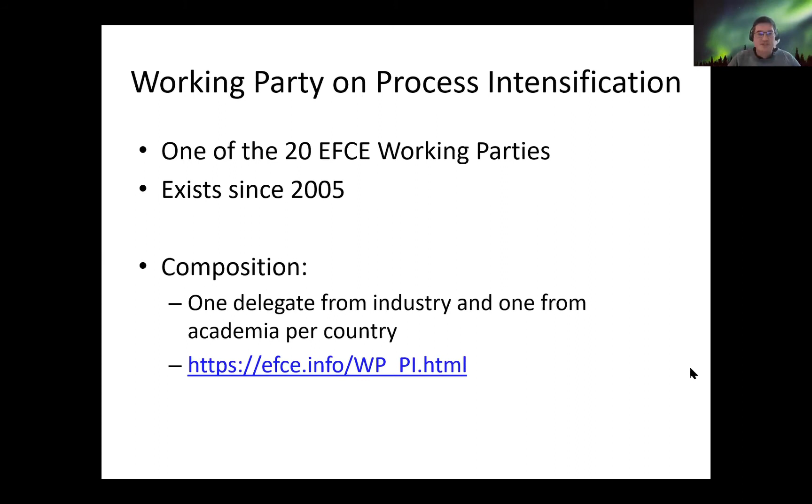What I want to do in my introduction is just shortly highlight three activities of the PI Working Party and even broader the PI community. First of all, the conference series that we have, the awards that we're handing out, and the support we give to handbooks and papers on process intensification.

We have a conference series, the International Process Intensification Conference. This has actually grown out of the European Process Intensification Conference, which was called EPIC. But since two editions, we have converted this into an international one with a lot of contributions from the US, from North America, South America, but also Asia. So the last one took place in 2019, last year. We had about 160 participants.

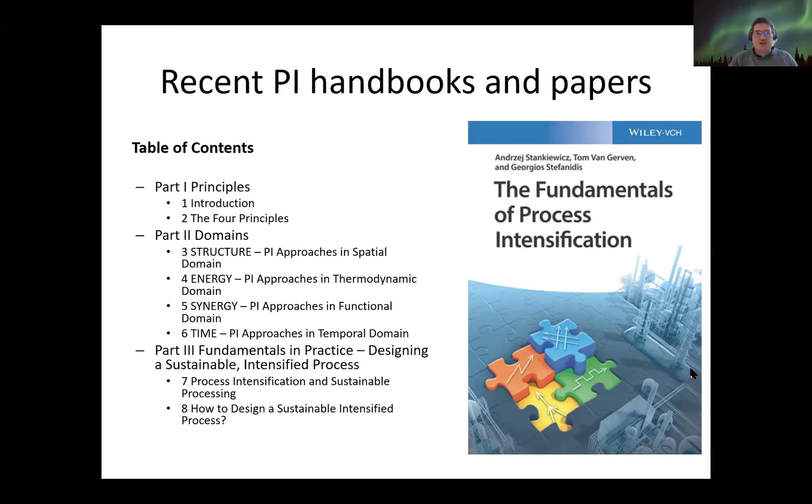And then a third activity of the PI community or the PI working party is to also support and develop handbooks and papers. I've just listed a couple of them. Of course, it's always difficult to be very exhaustive on this. But just as a couple of them, we have the Fundamentals of Process Intensification, which has come out, I guess, 2019. We have Process Intensification for Design, Industrial Innovation Practices and Education. This is the book by Jan Harmsen and Maarten Verkerk, from which they will take inspiration for their lecture later this morning.

There's also the handbook on process integration and intensification by Jiri Klemes, which will get a third edition coming out soon, probably 2021. I also want to highlight the fact that not only handbooks are being supported, but also papers. And I really want to highlight the activity that David Rivas and also Daria Boffito did last year to come up with these two papers on the current education of process intensification, and David will talk about this in his lecture as well.

And obviously, besides papers and handbooks, there's also a lot of journals that are related to process intensification. The Chemical Engineering and Processing journal, which I already mentioned, the newer one, Journal of Advanced Manufacturing and Processing, since 2019, and then there's even a more recent one, Open Access Frontiers in Chemical Engineering, for the section of Microfluidic Engineering and Process Intensification.

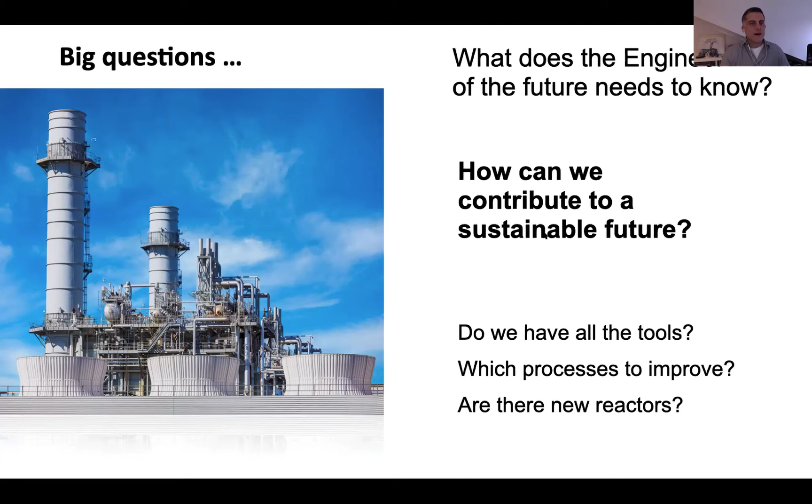So some of the big questions that we all have when we're trying to teach the new generations of engineers, and interestingly, they also have similar questions: what do we really need to teach the engineer of the future? How can we contribute to a sustainable future? Are we already prepared with sufficient tools to do that? Is there a new reactor that we could use to replace existing reactors? Other questions: is the university the right place to learn it? How can we make sure, as we are talking today about lifelong learning, that people who left the university 10, 20 years ago get the best information out there?

And then a question that is emerging more and more in the universities is: can I become my own boss? Because students follow in the news that many big companies are sometimes shedding labs or firing researchers. So this is something we also need to educate the new engineers about, that at some point they can have their own company, be their own bosses.

Now, a very short detour connected to this entrepreneurial or valorization approach. For those of you who are not familiar with the University of Twente, we're trying to claim that we are the most entrepreneurial university in Europe, at least. And there are several examples of success stories. Some of you probably have used Booking or Takeaway. Here is a small logo of the spin-off company that I started about 7 years ago. And for those who are interested in knowing more about Twente, here's a website.

As I mentioned in my first slide, I'm embedded in the Mesoscale Chemical Systems group. The word mesoscale gives us a lot of freedom to move from the nano, micro, all the way to the scale that we decide is large enough to do our research. We are a multidisciplinary group with sufficient clean room technicians, so we do a lot of microfabrication ourselves. And my own research, which I will not be talking much about today, is about exploiting bubbles and doing applicable research.

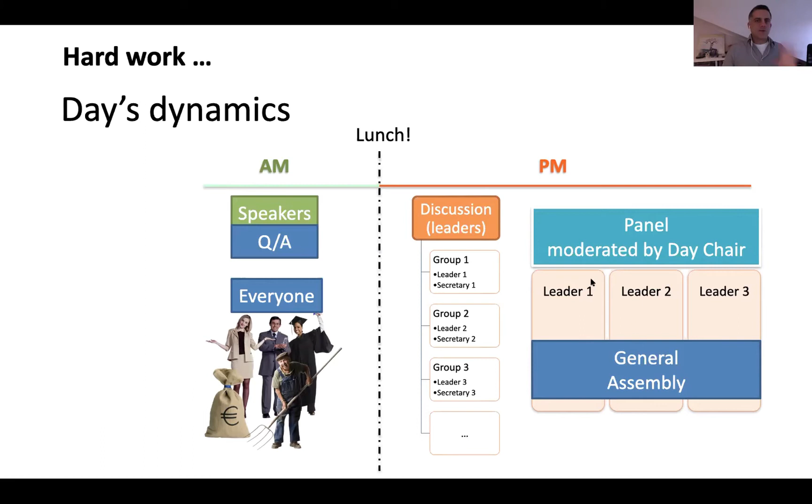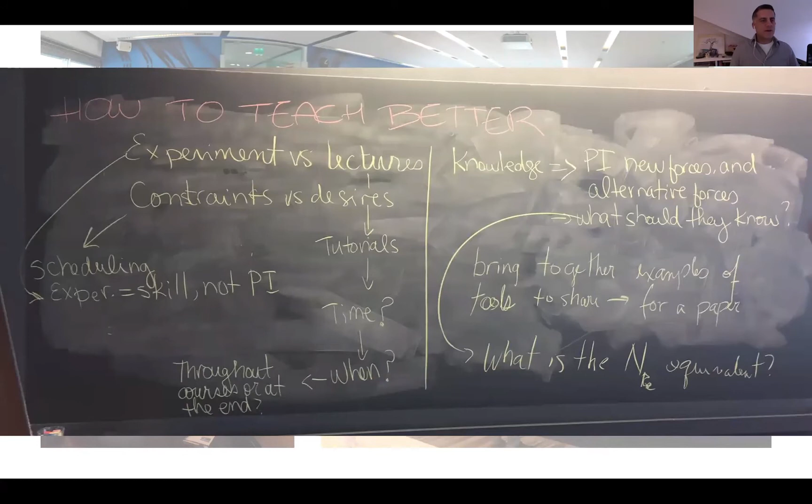And then in the afternoon, we will split into smaller groups to discuss some of the elements connected to those lectures given in the morning. So you can see here a feeling. So actually it felt like a classroom. So we had people who probably didn't sit in a classroom for like 30 years going to the blackboard and, well, giving input. So at the end of each day, we will collect all this information and try to give the next morning some summary in plenary session so that everybody could follow the whole thinking process.

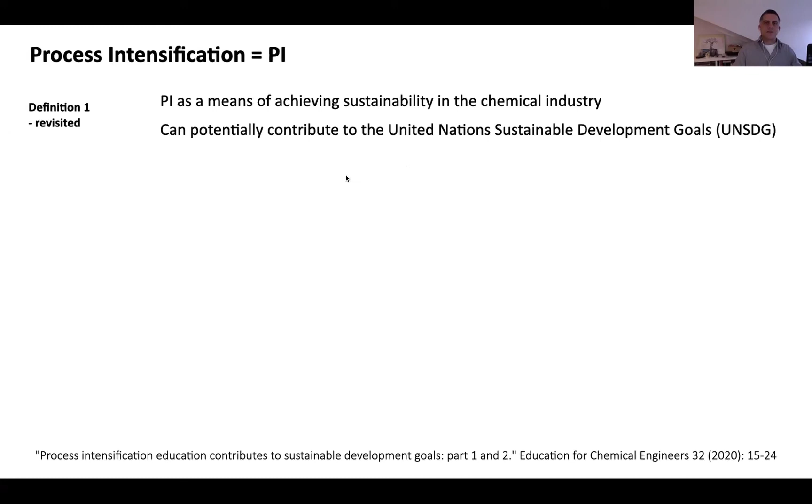Now, probably it's important to define what we mean with process intensification. And in these two papers, we have updated or refined the definition, which of course there are many books out there, but we try to synthesize it with the opinion of these 30 experts that joined during that week. So the most interesting part is that we see that PI can really help the chemical industry to jump from the fossil-based, say, track record or history path that we've been working for many years now, and move into some renewable-based chemistry. And we identified these 6 sustainable goals from the United Nations.

And well, in view of time and also to give chance for more questions, I'm going to skip some of these slides or move a bit faster so that we can have a better dialogue. And most of the details you anyway can see in the paper. I have to say the second part is open source, so you can download it freely. If you, for some reason, have no access to part 1, there are 2 ways to get it. It's either through my university website, so we have it already posted there, I think also on ResearchGate, but also you can send me an email and I'm more than happy to share with you.

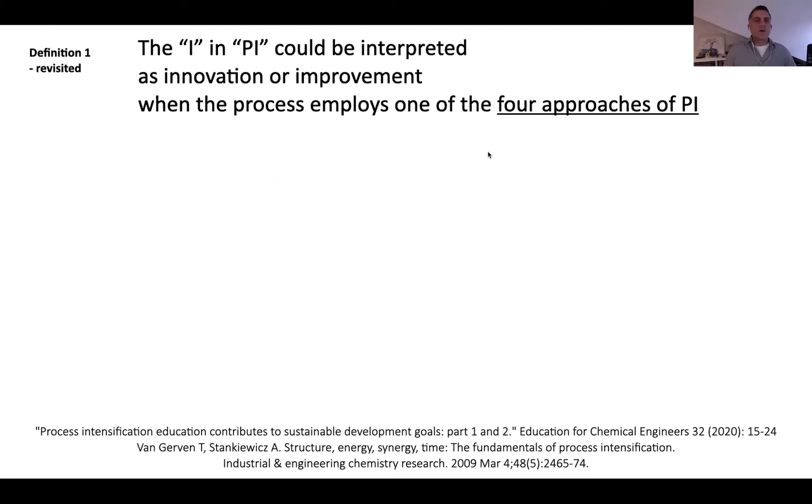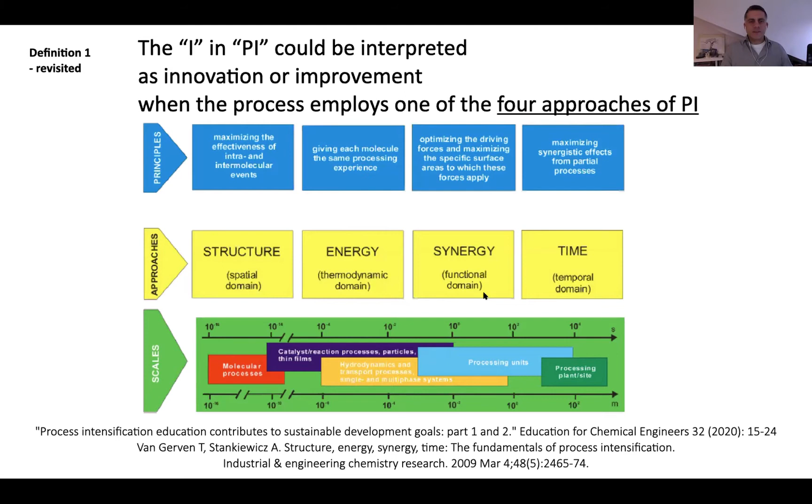Now, an interesting update that we bring to the PI definition is that we all agreed that the I in PI could be seen as innovation, improvement, and we also thought that it would be important for newcomers to the field to at least check this framework given by the structure, energy, synergy, time approaches, and the 4 principles of PI that were introduced a while ago by Tom and Andrzej Stankiewicz. And well, it's not my role to walk you through this schematic. So this is an invitation for some of you who are not familiar with these schematics. Please take a look at it because it's very helpful.

Now, after that event, we also kept thinking. So Daria, my co-applicant for the event in the Lorentz Center, and we had another publication that goes a bit more into details and it's a bit more technical, because the part 1 and part 2 papers that we're discussing right now are a bit more on the educational challenges and some opportunities, and you will see some examples of what was discussed there. But for some of you that would like to have a recent snapshot on how PI can connect the different scales and somehow the relation with process systems engineering, please check this paper as well.

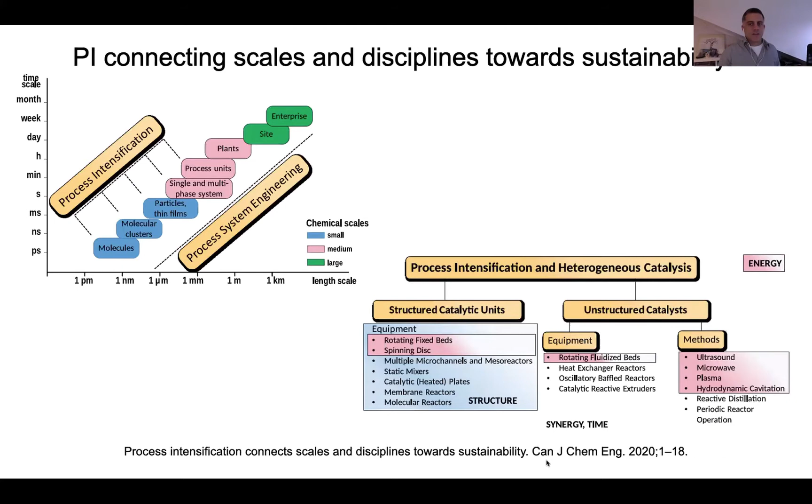Now, going back to the definitions of PI, so we also agreed that we see it as some sort of departure from the conventional way of doing things. We also identified that PI should in the future be not only concerned about the equipment or the specific driver that puts you there in the first place, but it's like what really happens outside the process and what are the consequences that your process could have for the environment or the economy.

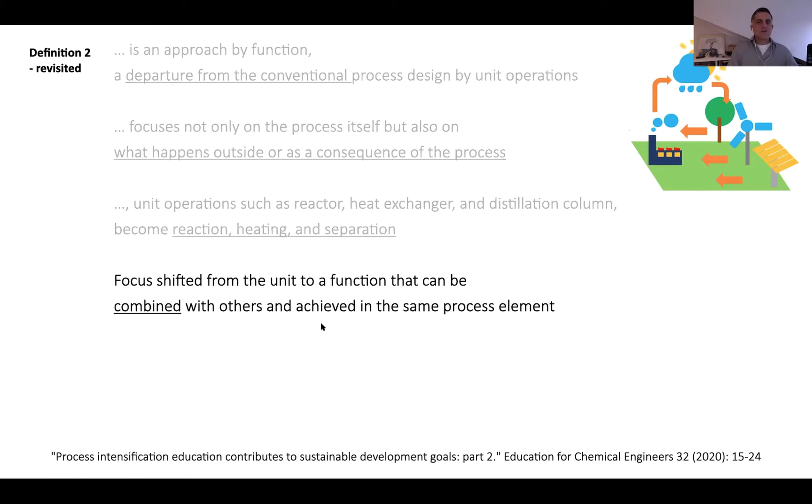So instead of having unit operations, we will have some, how to say, functions, and that can be a bit difficult to explain here, but it's better detailed in the paper. And one element that process intensification typically brings is combining several concepts or equipment or processes into one, and ideally you should have some significant improvement by doing so.

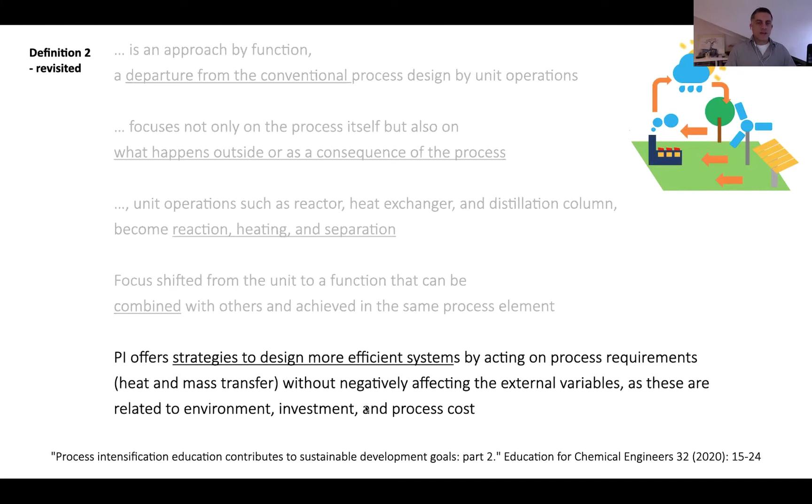And of course, this new technology or the intensified process or reactor in principle will be more efficient and environmentally friendly, etc. So the main conclusion of part 1 is that when you look at the toolbox that a chemical engineer typically has, PI brings a lot of new tools to combine with the existing set of tools that traditionally we've been learning over the years.

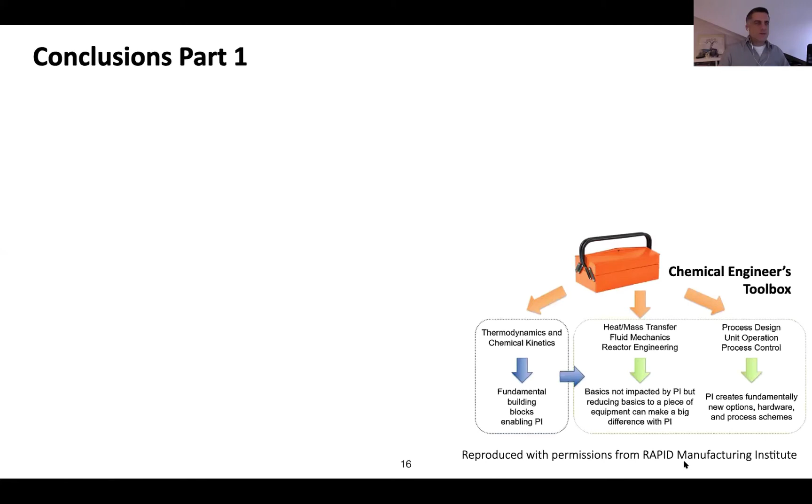So here I'm using a graphic from the Rapid Institute, so most of you probably are familiar with their activities there. But I think the most important take-home message is that obviously we all sitting there knew that this is important, but to really inform the public and the politicians, because we had a few representatives from governmental institutions, is that we all think that the work of the academia together with industry is the most important one.

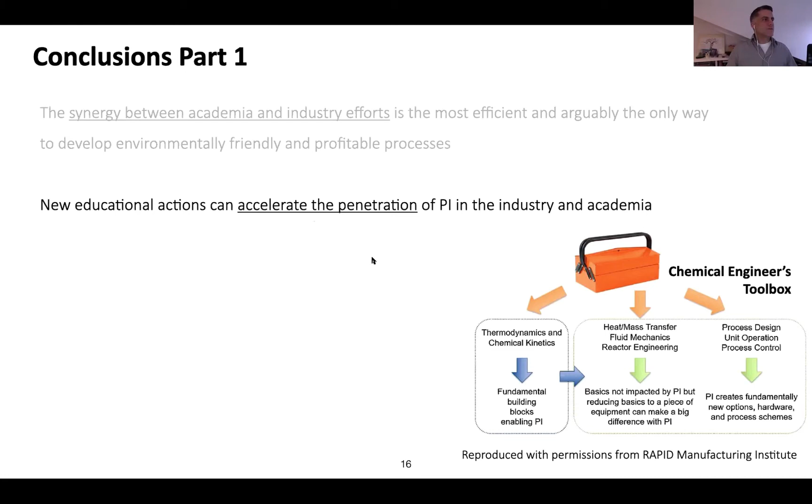And this can help us accelerate the penetration of PI in the work floor, because if the engineers studying now in our universities have a clearer understanding of what is possible with PI, then it's a lot easier to bring it to existing companies or even creating new companies. Also we are being open, saying that indeed not all processes need to be intensified, so we have to be self-critical and transparent.

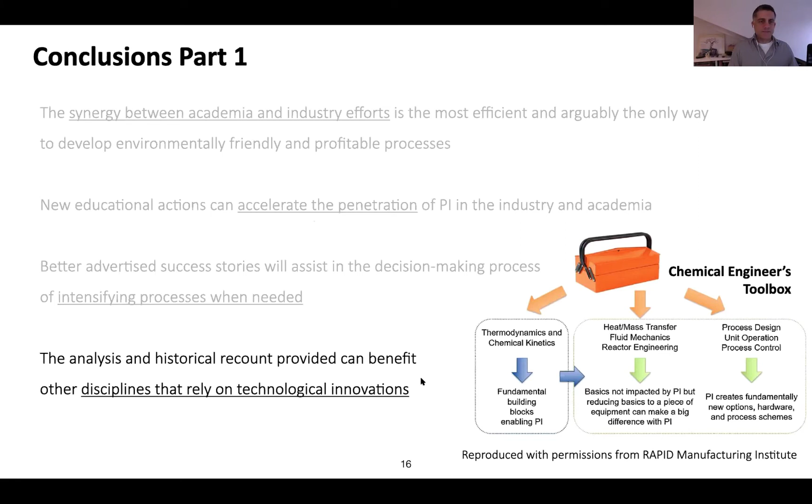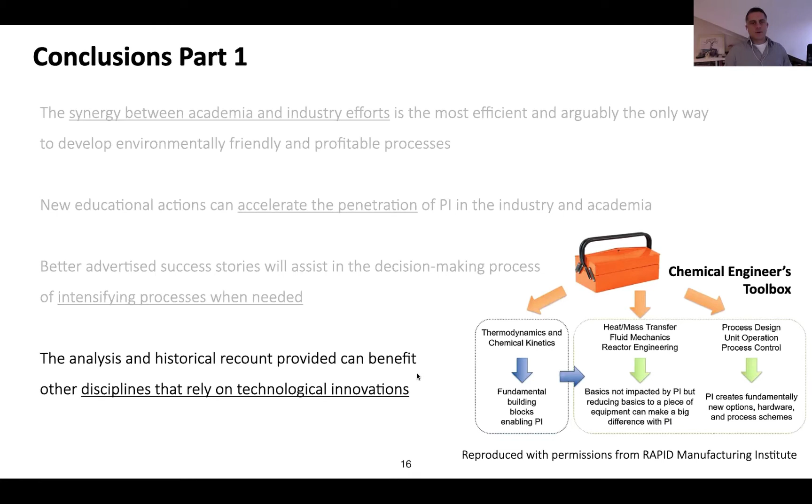And we also think that since we were talking also about education, some of the elements we discussed in that paper, if you replace chemical engineering from the pedagogical point of view, you could also apply to other disciplines. This is the main message from part 1.

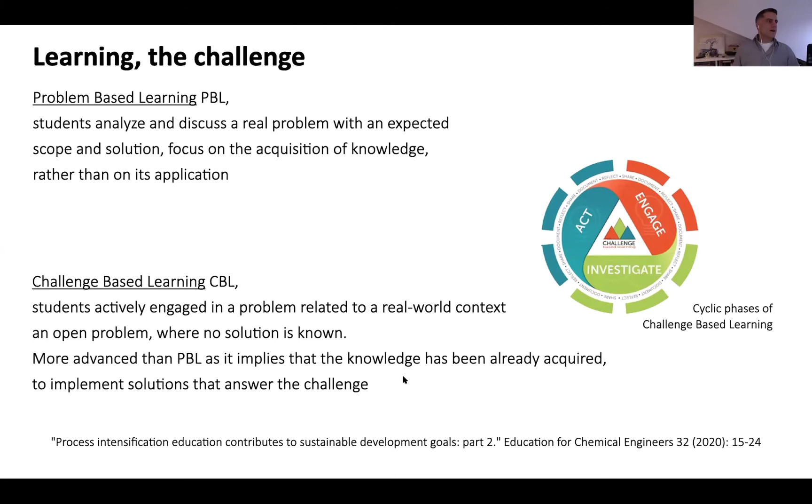Then, the main conclusions for part 2 are that we need to really educate not only at the master's level, the earlier we can, the better, but we also need to look at postgraduate education. Some universities are obviously giving the opportunity to professionals to come back and take a few selected courses. So if we manage to offer some sort of courses to refresh your knowledge, and people from industry could come and take those lectures, that would be very useful.

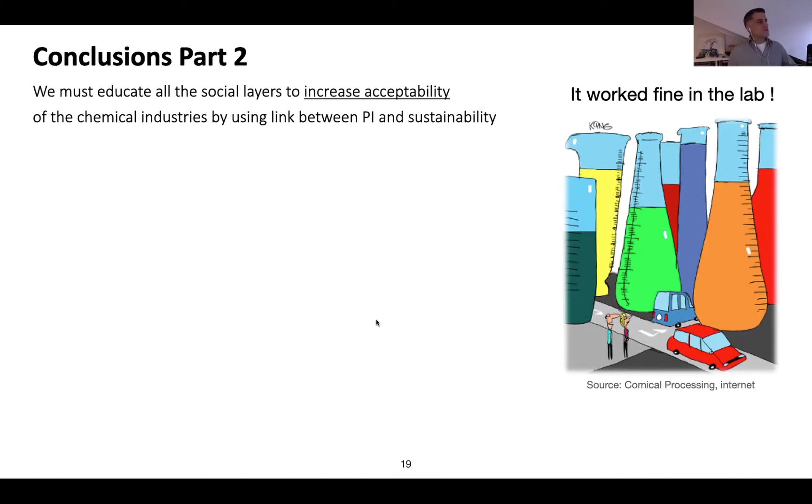I myself had 2 students a couple of years ago that left the university like 20 years ago. They took particularly the process intensification principles course because they wanted to see what was out there, and just the description of the course was interesting enough for them.

Well, of course, we all agree that PI has some risks in the technological and investment side. No need to discuss this right now. But the most important message for all of you that are connected to companies is that we really need input from what is working for the industry, because the students feel very motivated to work on problems that are reality, that are really happening now, not in a book that was written 5 years ago. Sometimes what we organize is a type of problem-based learning or challenge-based learning where the company sees the final presentation of the project,

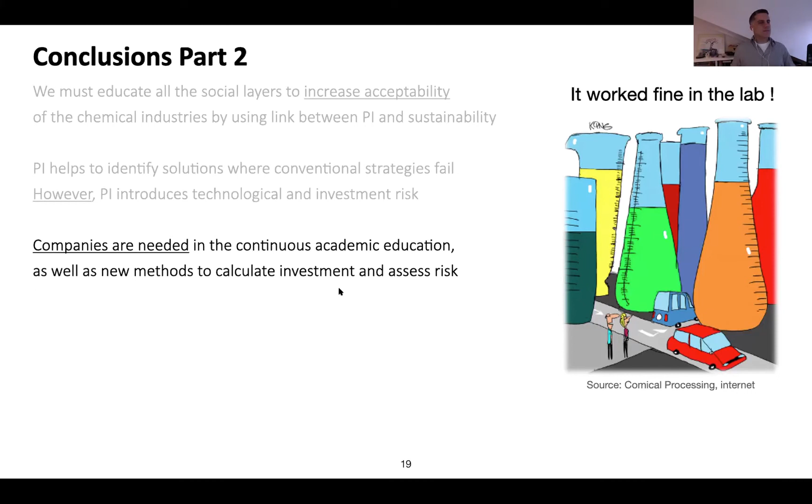so that they can really give a measure: oh, what you're saying makes sense, or what you're saying would never fly because it's, I don't know, commercially impossible. That really gives an interesting motivation for the student. And this is more or less what I was mentioning. The more case studies we have to show that PI works, the better the students will be convinced, and they become ambassadors themselves when they join the workforce.

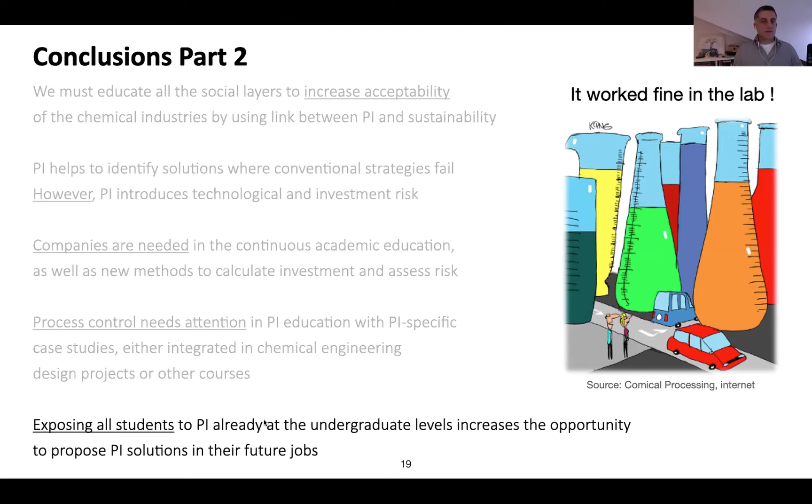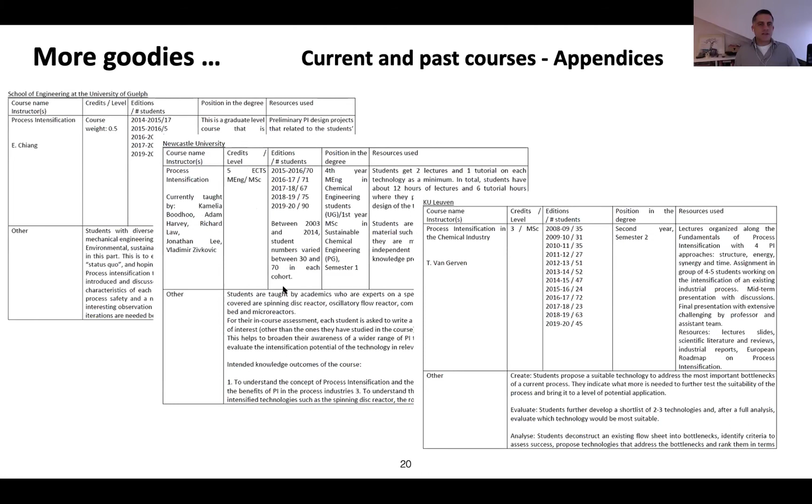And this I mentioned already. It's important to teach them PI because, as I said, either they join an existing company, or they could also start their own company. The appendices, actually, would probably be too long for a paper, but the most useful tool for many of you might be to check the appendices, because we have a lot of interesting tables describing what has been taught in the past decades even. So each university provides the number of teachers, the credits, how many editions, and some descriptions about each course. So I highly recommend checking that.

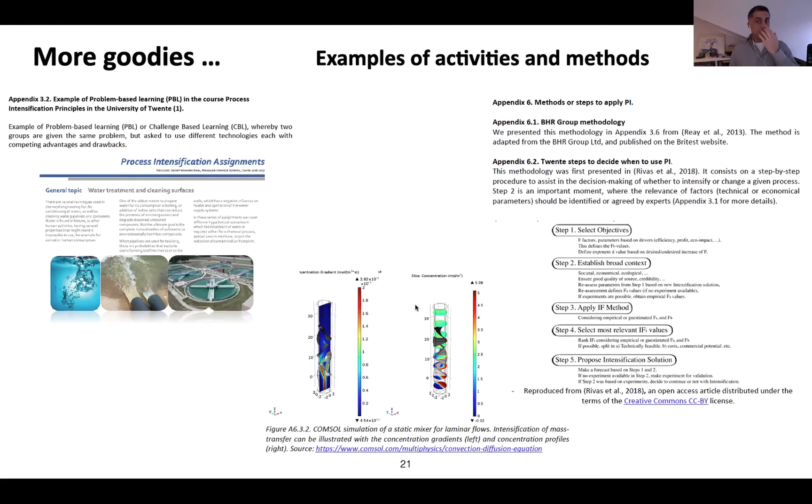And then we also have examples of activities or exercises that we are giving the students from all these universities. We have links, we have well-described assignments, so you could even use them on your own because they're already open access. But if you want to contact the teacher and improve something, everybody's more than happy to receive emails. One interesting thing that was discussed during the meeting that week is how can we teach the students the superiority of PI?

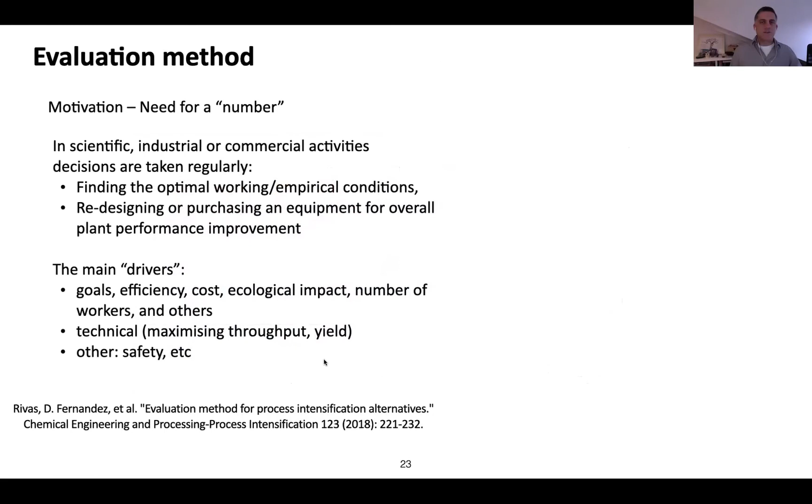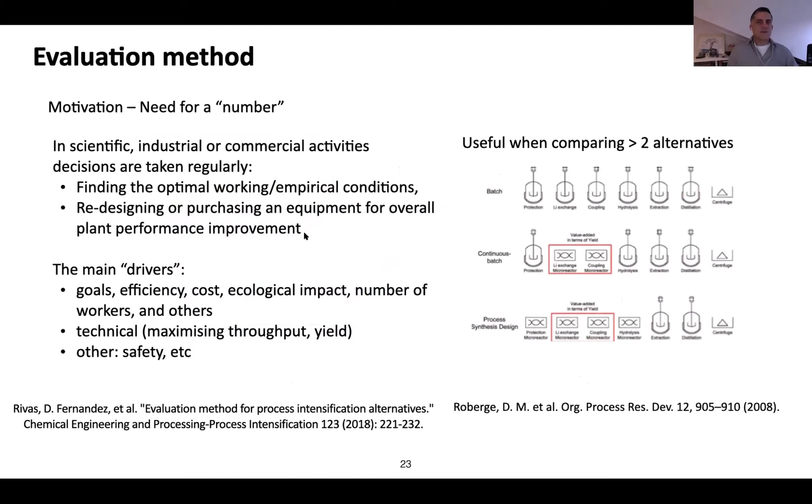So I'm not going to give you all the details because we have like 30 more minutes to finish, also for the questions. But all this is described in this paper, and some examples are given in these two papers that I'm discussing with you today. Just to give you an example, sometimes when you have to compare between more than two alternatives, so if you have a batch process or continuous or a hybrid, then this method is quite a simple starting point. Even for the students, it's very illustrative, but it's also being used in industry. I'll give you one example in the next slide.

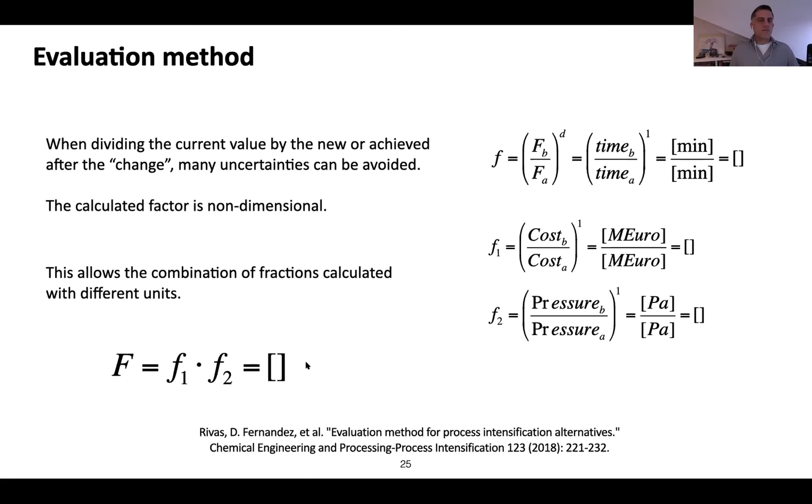Well, some of the advantages is that you can actually put together many of these factors and forget about the units, because of course you cannot really compare money with pressure and other stuff, at least at a first sight. And well, you end up having this sort of a number that is non-dimensional. So this has been used in practice.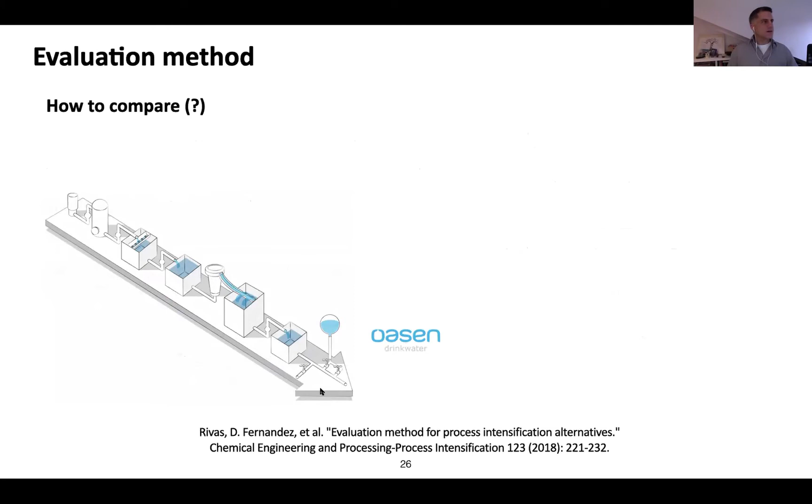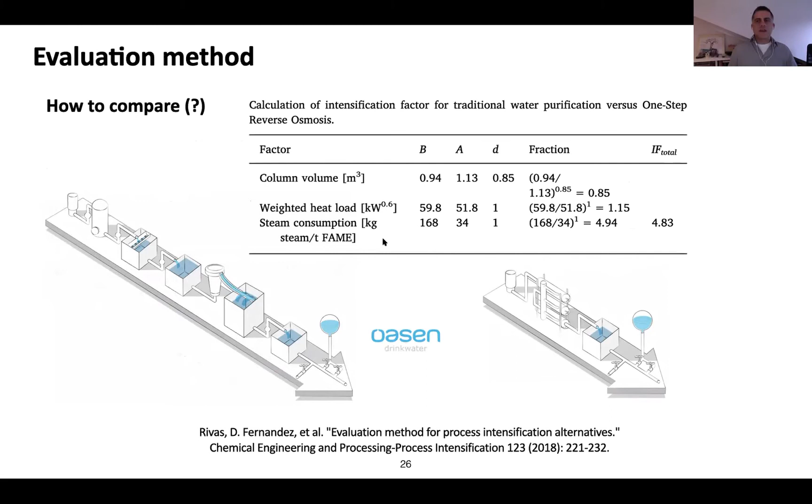For example, this is a water utility company here in the Netherlands, and they were planning to replace their process lines by a reverse osmosis plant. And so we did this analysis together, and well, it turned out that based at least on these 3 factors, sometimes it's difficult to bring enough factors to have an interesting case. But in this paper, you can find many more elaborated cases about this.

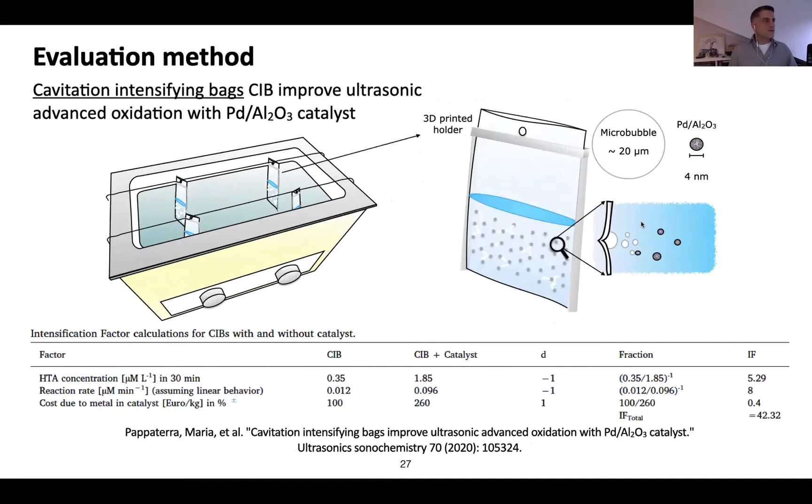More recently, the same method was used in more academic settings, but then using ultrasound, which is a process intensification technique in itself, and for advanced oxidation processes. And then again here, you have 3 factors. So the cost of the catalyst, the reaction rate, the concentration of hydroxyterephthalic acid. And then in the end, you have a value that if it's larger than 1, then by using this improved intensified reactor, you have a better result than with a conventional advanced oxidation process.

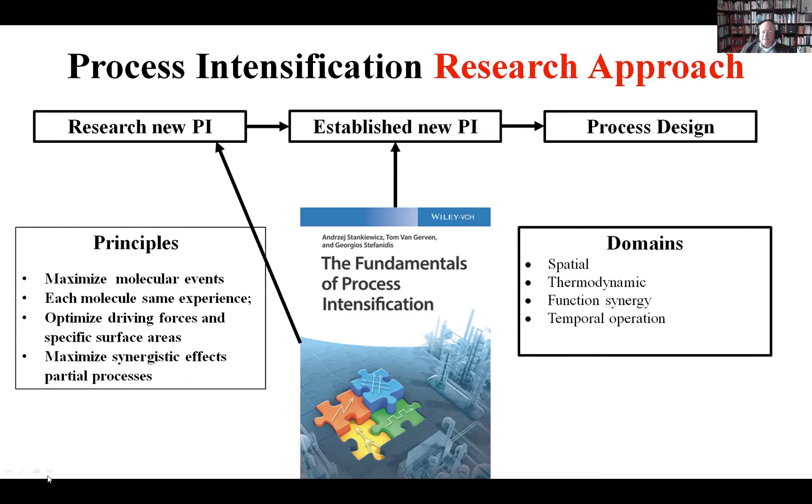The other approach, also described in literature, is about process intensification as a design or a process synthesis approach. Here, the focus is on designing, not using unit operations, but using functions. So you first, in the scoping, you define the problem, inputs and outputs, and lots of other criteria, of course. And then you generate lots of ideas, but using the function description. The function is simply stated what should be done, not how it should be done.

And functions are quickly pictured or can be drawn quickly because you only have to state what you want to achieve in that step. And then once you define the functions, then you can try to integrate the functions, and integrating the functions, of course, is not so easy. And there you use modeling and simulation to see whether the integrated idea is feasible. And also later, when you have followed a few cycles of synthesis and analysis, you can optimize the new idea. And once you're happy enough, you can send it to the evaluation and go to the next innovation step.

The founding father, so to say, of this method is Jeff Siirola. He got his PhD in 1971 on this process synthesis method. And he is also the founding father of the Eastman Chemical reactive distillation, where you can see all the ideas into a single clever column, which has been commercialized. And I also found a book, there are several more, on process synthesis and process intensification, where you can see the methods to use this new way of designing.

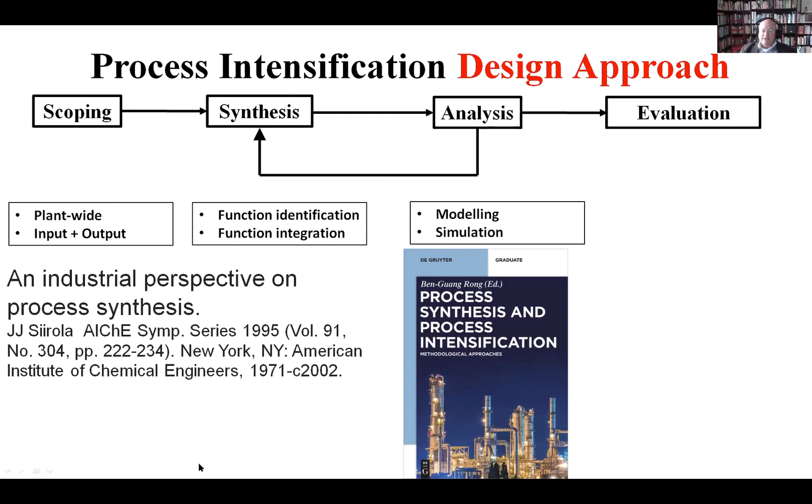Maybe I should stress, it's not one or the other, and maybe I'll try to explain that in the next slides. Next slide, please. I've tried to combine the two methods in a single method. So I use the domain things of Tom van Gerven, and I put them in a sequence.

It's still okay? People can still hear me?

Okay. The first step is consider the whole process, which I call plant-wide. So you look at input to output and what should be done to get from input to output. And of course, it's very advantageous if your reaction doesn't produce any byproducts. So you can use here all the tricks in the book of Tom van Gerven and Stankiewicz of not having byproducts. The second step is functions and their integration.

So try to minimize the process equipment you have, because any process you have and you can minimize them, you have less flanges, less connections, less control. Also, if you look at the thermodynamics, you're far more efficient. So you both gain on capital cost and you also gain on energy requirements. And a beautiful example is, of course, reactive distillation.

The third one is a dynamic trick. And there is an enormous number of commercial scale dynamic operations, which they call reverse flow combustors, where they cleverly use the dynamic trick, the temporal trick, for having a beautiful solution. And another simple one is cyclic distillation, which also very cleverly uses, on the one hand, the process is continuous, but because they use this cycle of feed, which have periods, it behaves like a batch reactor.

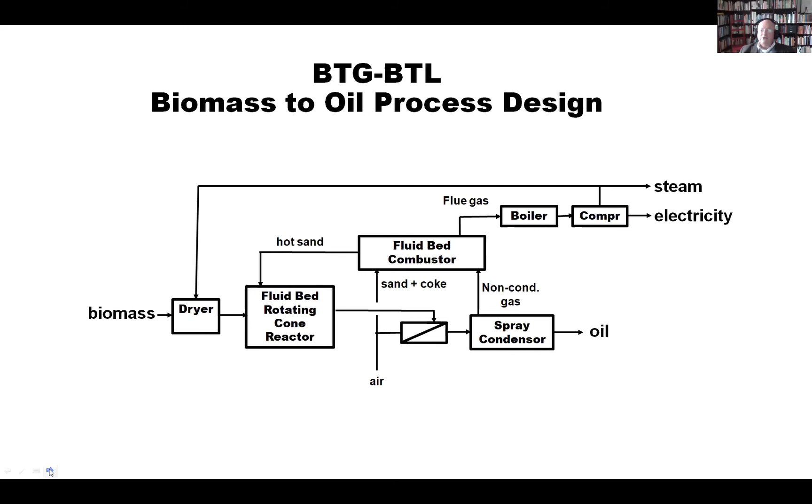Beautiful process, and I will show, next slide please. Here you see the process intensification elements. The first trick is they don't use any fluidization gas. They only use the biomass which is gasified as the fluidization gas. And not having an additional gas, of course, helps enormously downstream. The separation is far more easy.

Also the mixing, everybody knows in pyrolysis you need very rapid heat up and very rapid cool down. Very rapid heat up with nearly a plug flow of your vapor also helps to have a high yield. And the energy is also alternative here. You don't have a heat exchanger here, but you use the hot sand to supply the heat.

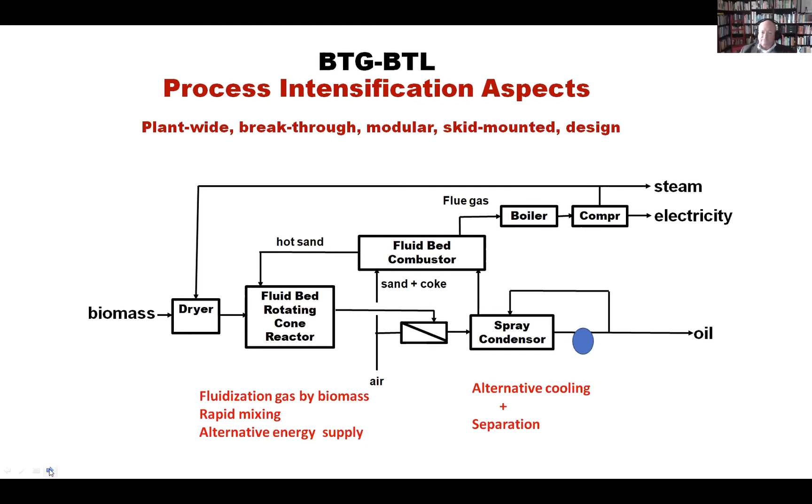The next thing where they have used process intensification is in the spray condenser. You have the cooled product oil, and part of that you recycle back to the spray tower, and there the cooled droplets condense the biogas, and then you have the final oil. So you have a very nice cooling and separation without any heat exchanger. And I think, next slide, please.

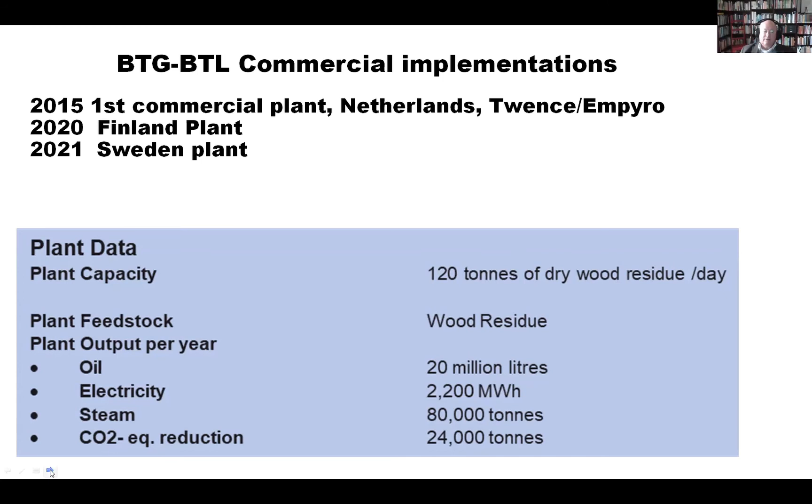and the modules are tested first dry in the Netherlands and then transported by truck to Finland, and there they are assembled, and then the startup can start. Next slide, please. And I now give the floor to Maarten. Maarten, hit the road, I would say.

Jan, thank you very much. I hope everybody can hear me well. I would like to start to make a small confession in that way.

When I look back to my career, it is a mixture of hard factors and soft skills. My first PhD was in solid state chemistry, and after that I did research at Royal Philips, and I was for more than 15 years operation manager and R&D manager in the ceramics process industry and glass industry.

And in 2004, I wrote a second PhD, and that was about processes on the shop floor in factories. And finally, it was about power and trust. And later on, I became a professor in philosophy and ethics of technology. So if you see in my career, there are a lot of hard factors and a lot of soft skills.

And I had an intensive dialogue with Jan about hard methods and soft skills with respect to process intensification. And I would like to share some thoughts about it. We call that the innovation practices methods. And we would like to present you three important items. First, the VIB model. Second, the idea of innovation practices with respect to a multidisciplinary team approach. And lastly, innovation practices as cooperation in innovation networks. Next slide, please, Ines.

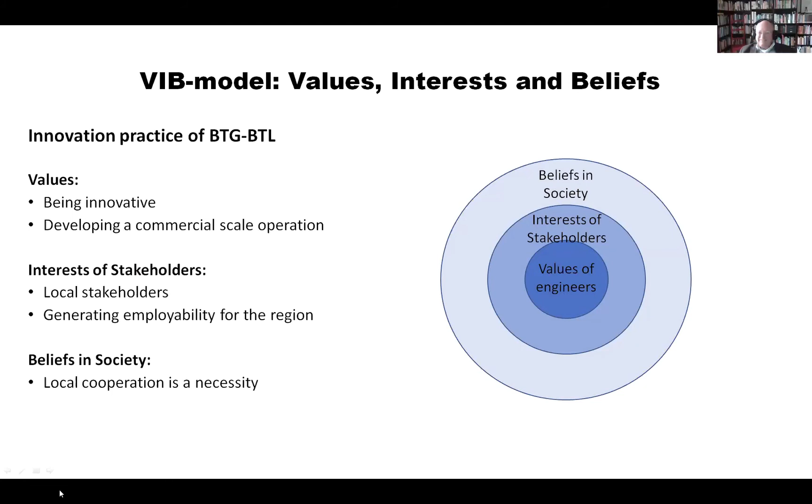I would like to come to the second point. As I told you, I have a broad experience in industry within Philips and also about innovation. And in general, you can say there are three main practices in the industry. The first is research and development. Second, marketing and sales. And the third one is operations.

If you look to these three practices from the practice point of view, then you realize that every practice has its own culture, own language, unique knowledge, specific contribution to innovation. Often we think that the real contribution to innovation is by R&D. I think R&D is tremendously important, but also marketing and sales and operations can have a very valuable

contribution to innovation. And Jan and I, we talk about innovation practices, and that implies for us an intense cooperation of R&D, M&S, and operations. All have to contribute to innovation.

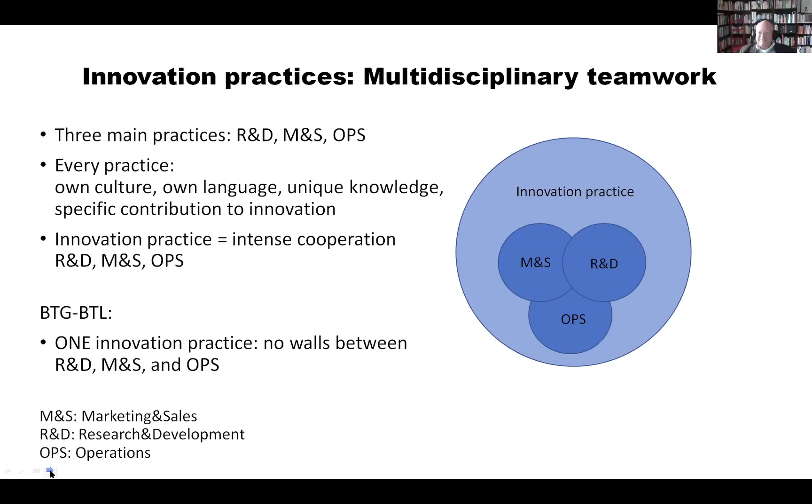And if we look back to BTG BTL, and the same holds for all the other cases we describe in our book, there was one innovation practice. There were no walls between R&D, M&S, and OPS. All these innovation practices were working together, and all their specific knowledge was used for the development of PI. Next sheet, please, Ines.

The third point I would like to focus on is the idea of innovation networks. We see that with all cases described in our book, it is not only about one single company with one single innovation. It's always a cooperation of industries, universities, customers, EPC contractors, authorities, and so on. And here, basically the same holds.

If you look to all these stakeholders, to all these partners, they have their own culture, their own language, a unique knowledge, and they all can deliver a specific contribution to innovation. And that means that we learned from the case studies in our book that if you really want to have a good process intensification, then you need an innovation network. You need an ecosystem. And especially we saw that in BTG BTL.

BTG BTL is located in the eastern parts of the Netherlands. And I have lived there for many years. Now I live in the south of the Netherlands. And to be honest, they are two different cultures, although it is in the same country. But we don't really speak the same language.

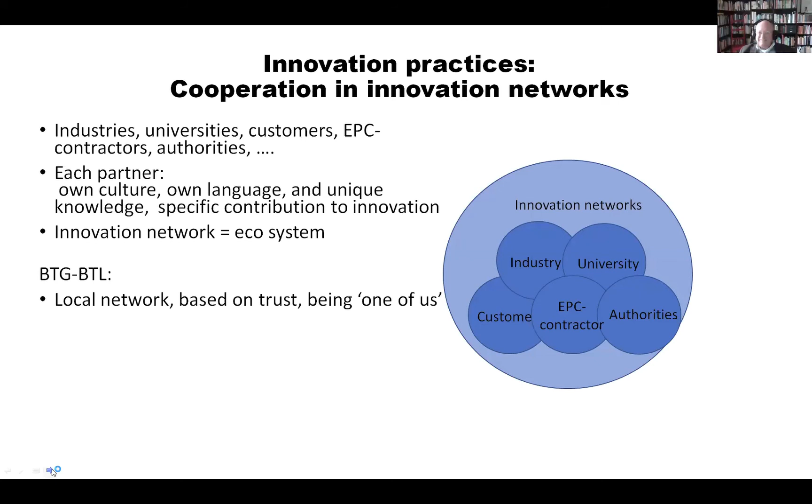And at the moment when the network spread out and the innovation network was established with the plant, the customer, the EPC contractor, the local authorities, in all these parties there were engineers from the Twente University or from BTG BTL. So it was an innovation network that spoke the same language and had the same values and wanted to realize the same objectives. Next one, please.

So what did we do in our book? We did an analysis of 5 industrial successful PI innovations. It was BTG BTL, discussed today, Eastman, Maleta, Shell Omega, and in pharmaceuticals. And in all these cases, we show the importance of soft factors.

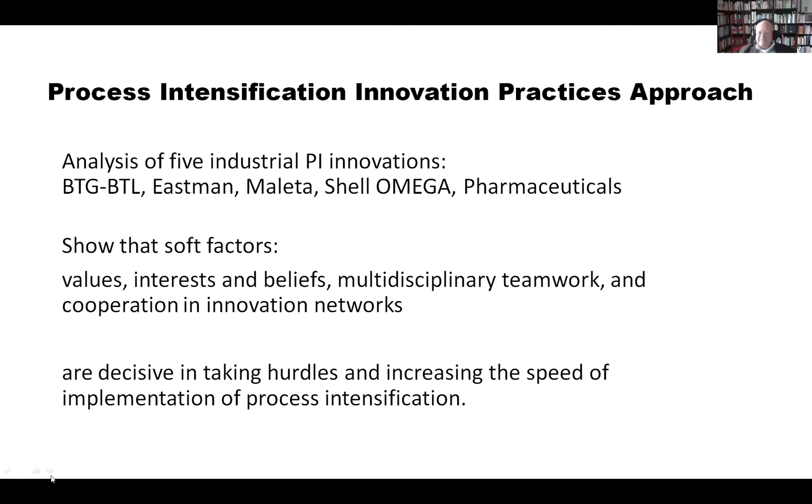And in our view, these soft factors are also decisive in taking hurdles and increasing the speed of implementation of process intensification. Next slide, please.

So if we talk about industrial training, and this is a summary, we have to train industrial engineers in the concept design of 5 domain steps. We have to train them in innovation practices, the VIB model, about innovation practices in the company, about innovation ecosystems. We have to train them, and we discuss that in our book, in innovation stages and the Gates method.

We have to train them in industrial cases, showing how engineers succeeded in realizing a breakthrough in PI innovation. And in all types of workshops, we have to discuss different types of cases.

Next sheet, please. And I think all these things you can find in this book, and I hope that when you read the book, you will enjoy it. Partly we had a different background, but we enjoyed it very much to write this book, and I hope that you enjoy reading it. Thank you very much.

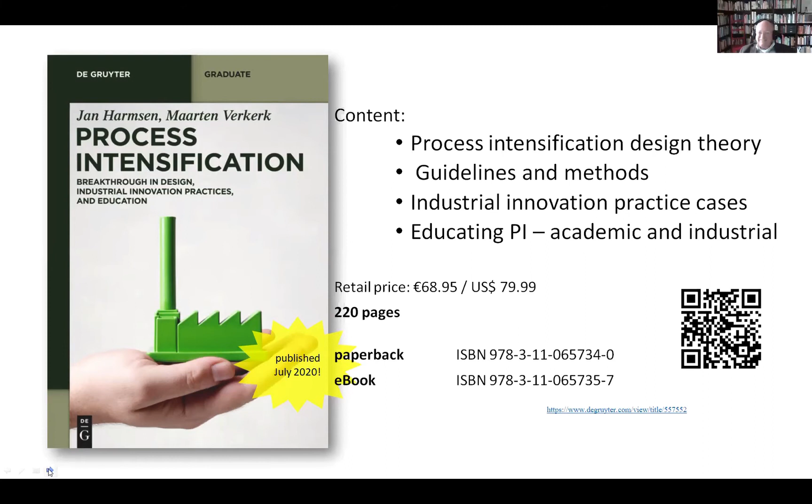Thank you, Maarten and Jan, for this very interesting presentation. If somebody from the audience has any questions, then please post this in the chat or in the Q&A. I see that Silvia Polverini has a question. Could you mention who are the companies that allocate economical resources in the next 10 years to build up the PI integration in their industries? That's a very specific question. So I don't know, Maarten or Jan, whether you have any answer to this.

I cannot give the complete answer. I only have a very limited knowledge of companies that have applied and are applying process intensification. The largest implementations of process intensification you find, funnily enough, in the oil refineries. So Shell and Exxon, they have built more than 200 reactive distillations. You also find them in the mining industry, where they have used more than 1,500 reverse flow combustors for producing sulfuric acid.

I think very likely you'll also find them in the specialty chemicals like Arkema, Eastman Chemicals, companies like, oh, BASF. Oh, how could I forget BASF? BASF alone has 57 reactive distillations, and I'm pretty sure, although they don't report, that they have many more intensified processes, because they cover the whole field of fine chemicals, specialty chemicals, bulk chemicals, and oil refining. And I'm pretty sure they apply process intensification everywhere.

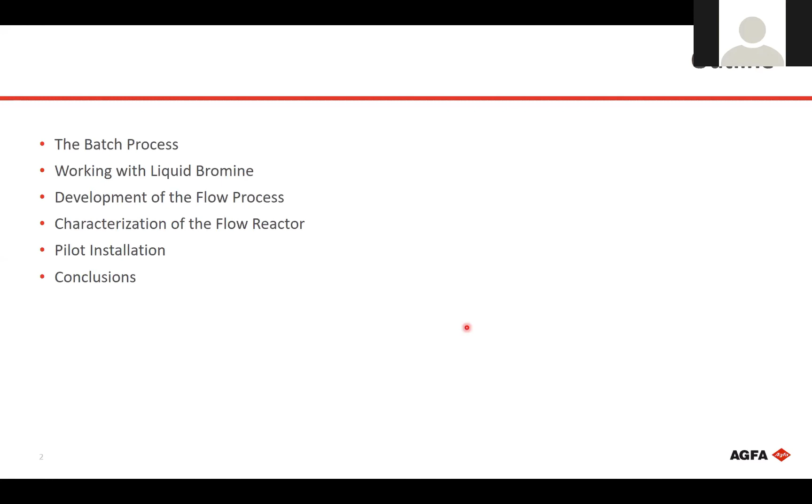This process in itself is close to quantitative. It has perfect yield. It has very high purity of the end product. So all in all, chemically spoken, it is a nice process. There is an issue, however, because we have to use this sodium hypobromite, and that is a problem. Hypobromite in itself is not stable, so you really have to generate it on the spot, otherwise it will decompose before you have been able to use it.

And a common way of producing sodium hypobromite is by the addition of liquid bromine to a cold caustic, so that means sodium hydroxide or potassium hydroxide in water solution. So you just add the liquid bromine to the potassium hydroxide, and you will have a nice reaction. It's also quantitative, no side reactions. So all in all, again, chemically spoken, the generation of the hypobromite in itself is a very neat process. But the main issue is we have to use liquid bromine to do so.

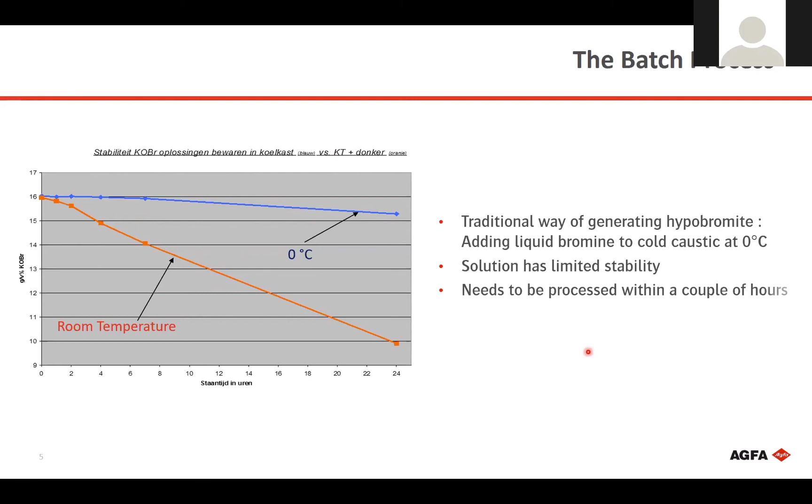So the traditional way of generating the hypobromite, as mentioned, is just the addition of liquid bromine to cold caustic solution at 0 degrees with a limited stability, and we need to process it within a couple of hours. Again, this is challenging but not impossible in a chemical installation. We have a large multi-purpose batch installation with several reactors next to each other and the possibility to transfer liquids between the reactors. So it is feasible, but it's not very practical.

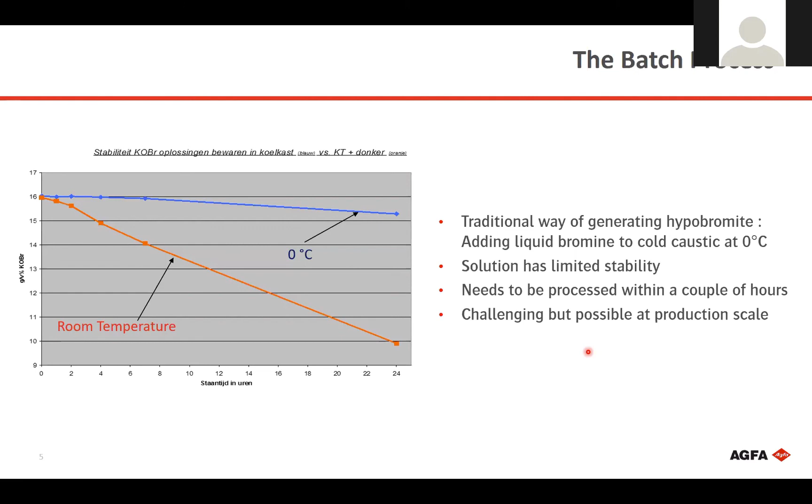The main issue, as I have already mentioned, is the fact that we need to handle liquid bromine. Liquid bromine is quite a nasty chemical, and to be honest, it's about the nastiest chemical we are using in our factory. Why is that? Because it's very toxic by inhalation. It has a TLV value of 0.1 ppm, which is very, very low. So everybody working with liquid bromine really needs to have full protection, like you can see in the picture to the right. You need a full face mask, chemical suits and all that kind of stuff.

Moreover, it is highly volatile. It has a boiling point of only 59 degrees, and it really gives off this, well, it gives nice pictures, but it's not nice to work with.

It really gives these very toxic orange fumes, which can be very dangerous. Moreover, bromine in itself is also very corrosive, both to skin and to metals. So that means that you really have to be careful in spilling, and you really have to be careful that you don't have any leaks, and you really have to take care of the material compatibility of your entire installation. It's a heavy liquid, the vapor is heavier than air, so if not really necessary, you don't want to work with it.

An extra problem in our case is the availability of liquid bromine. You can buy it in these bottles of 1 liter from Acros or Aldrich or the like quite easily, but if you want to use it at larger quantities, you immediately have to take the step to 400 liters, which is about 1 ton containers, which look a little bit like this.

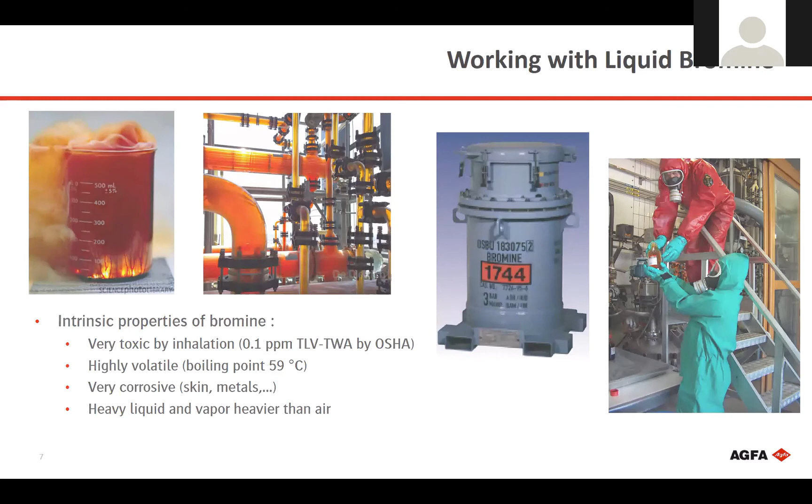So all in all, we had a process which was running relatively nicely at a 400 liter scale in production, but with some major issues. As mentioned, the handling of the bromine and the availability of the bromine is probably the largest issue. Also from a costs perspective, there was an issue because in our facility, we are limited to 400 liter scale when we work with this type of highly toxic components.

At 400 liter scale, we have the possibility to use reactors which are contained, located inside walk-in fume hoods, with only 1 or 2 reactors in that area, which can be kept completely closed. But the maximum size of the reactor there is 400 liters. So that makes it a relatively expensive process. If we need more of this product, it will become quite an expensive thing because we cannot scale it up to larger scales.

As mentioned, stability of the hypobromite, of course, is a main issue. We have to control the exothermicity of the process. And for other chemical reasons, the dosing of the hypobromite needs to be done relatively quickly, in 90 minutes, and that can sometimes be a little bit tricky as well.

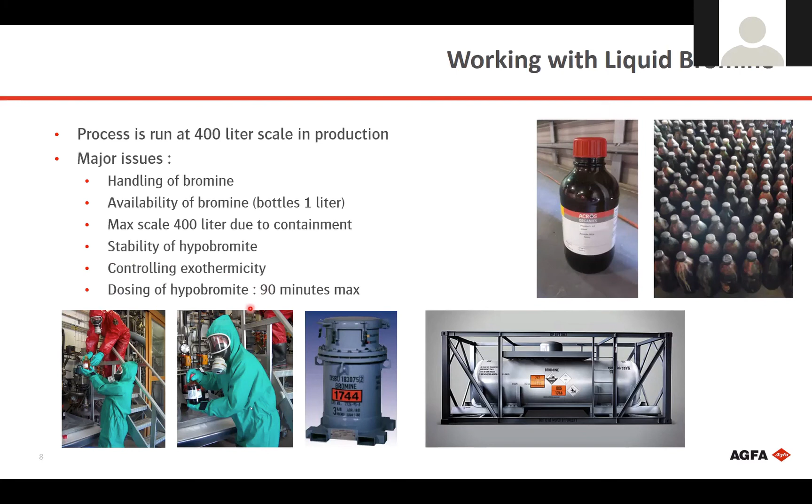Okay, so this led us to some thoughts, and quite literally during a coffee break, somebody made a remark: well, why don't we make our bromine in flow if it is so dangerous to work with it? That made us think about the process as a whole, and we did some literature search, and that revealed that hypobromite can be generated directly from bleach and sodium bromide.

So bleach is simply hypochlorite. It's household bleach, but for industrial use, with a higher concentration. And sodium bromide is just the bromide equivalent of simple salt, which is sodium chloride. So if you mix bleach and sodium bromide, you will have an exchange of the chloride from the bleach with the bromide from the sodium bromide, and you will generate the hypobromite directly.

This was new to us, and it's very strange because when we started looking into literature, we found publications in the Journal of the American Chemical Society dating back to 1948 already explaining this reaction, and moreover, it is a widely used process in water treatment, where hypobromite is also used for the disinfection of water. So strangely enough, in one industry, this process is very well known,

and in another industry, in this case the fine chemical and organic synthesis domain, it is not so well known, because if you look up reactions where you use hypobromite to perform a bromination in the current literature, you will still quite often find, for instance in the Journal of Organic Chemistry, a process description where you first generate hypobromite by adding liquid bromine to caustic. So very strange that even 50 or 70 years later, it is not commonly known in the organic chemistry field.

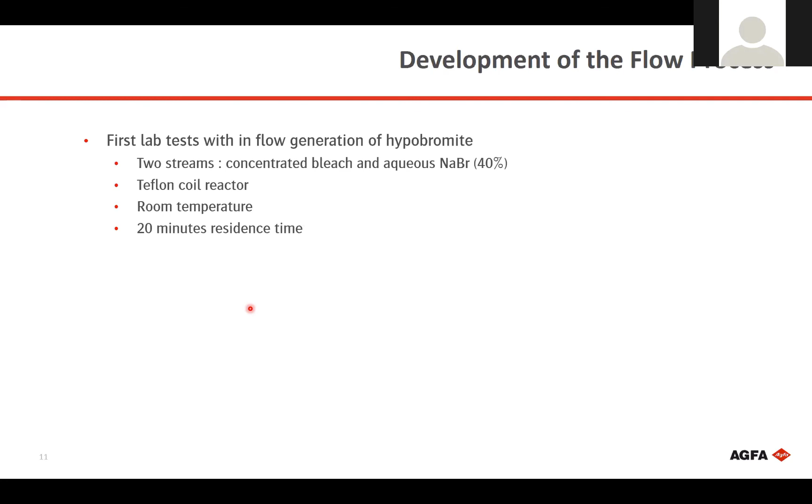We pumped them through a coil reactor with a certain residence time. We just chose arbitrarily 20 minutes residence time to give sufficient time for the reaction to take place. And we know that at room temperature, the solution will be stable for at least 20 minutes. So that should not be too much of an issue. So we generate the sodium hypobromite solution inside the coil reactor here. And the outlet of the coil reactor is then immediately attached to the batch reactor, where we have the toluene solution of our starting material sitting, and the bromination reaction can take place immediately.

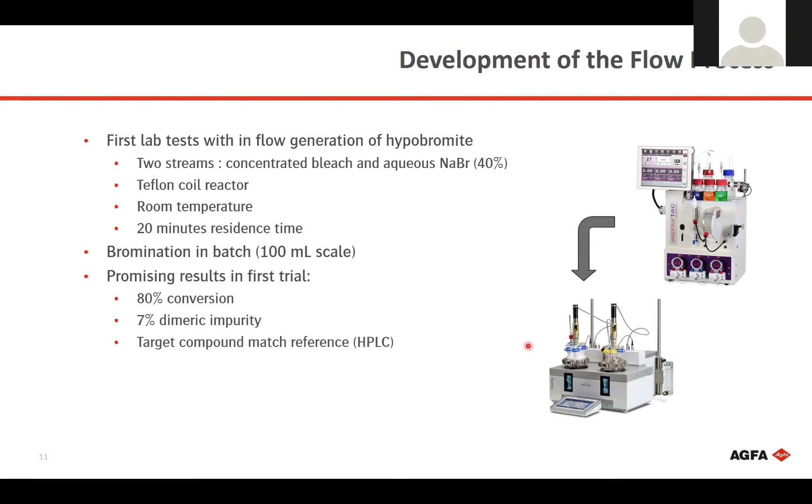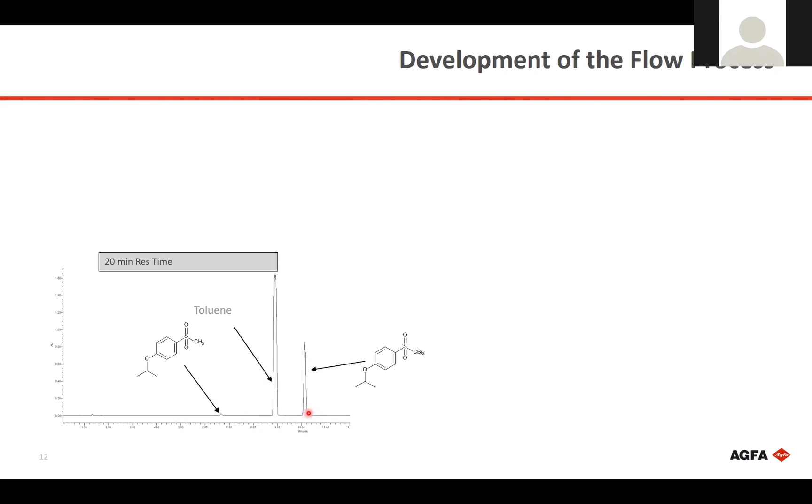We did find out that the residence time inside the coil reactor is quite important. Here you see an actual HPLC trace. This is the kind of HPLC traces which makes chemists happy, because this is the starting material. You can just see a little bump here. This is the final product we want, very nicely. And this is just toluene from the solvent. And you can see there's basically nothing else present in this chromatogram. So we have a very nice process, with a very clean product, with high yield and high conversion. So that looks very promising.

These 3 peaks correspond to the tribromo, the dibromo monochloro, or the monobromo dichloro. So if you have insufficient reaction time for all the bleach to react away and to be converted into the hypobromite, you will have chlorination instead of bromination, and that is something which we don't want. So therefore, it is important that we have sufficient residence time to make sure that we have no residual hypochlorite left, because that will lead to the chlorinated product.

And that brings us to the next point, the characterization of the flow reactor, because we do know that the residence time inside the reactor is critical, because if the residence time is too short, we will have unreacted hypochlorite. But as you all know, if you pump a solution through a plug flow reactor, you will have deviation from the ideal plug flow behavior. And that deviation will lead to part of the reaction mixture having a shorter than expected residence time inside the reactor. And that, again, may then lead to chlorination instead of bromination. So therefore, we wanted to know quite exactly what the residence time distribution profile of our reactor looked like.

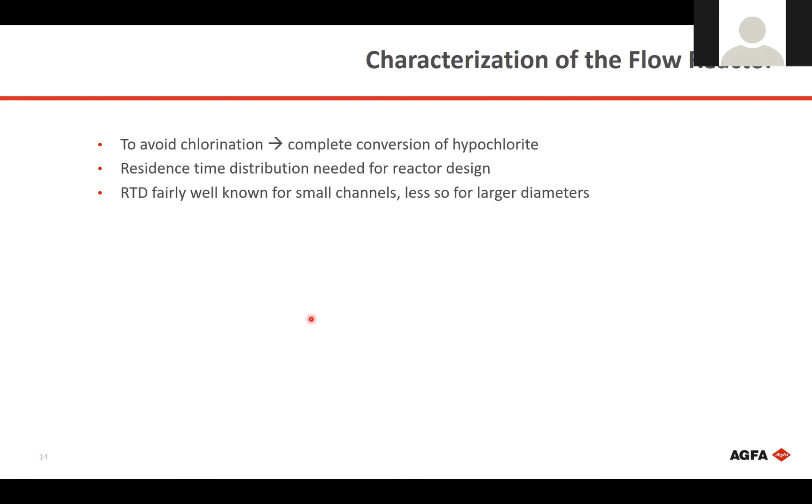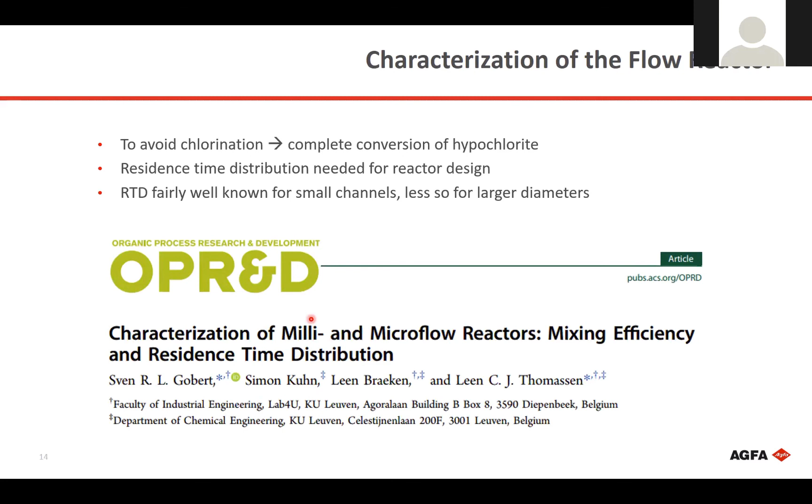Residence time distributions are fairly well known and well described in literature for small channels, but not so much for the larger diameters. This is a very interesting article which I would recommend all of you to have a look at: Characterization of milli and microflow reactors, mixing efficiency and residence time distribution. It was published in the Organic Process Research and Development Journal from ACS. It is from the group in Leuven Diepenbeek, and there they describe what the influence of a varying diameter at a millimeter scale is on the residence time distribution.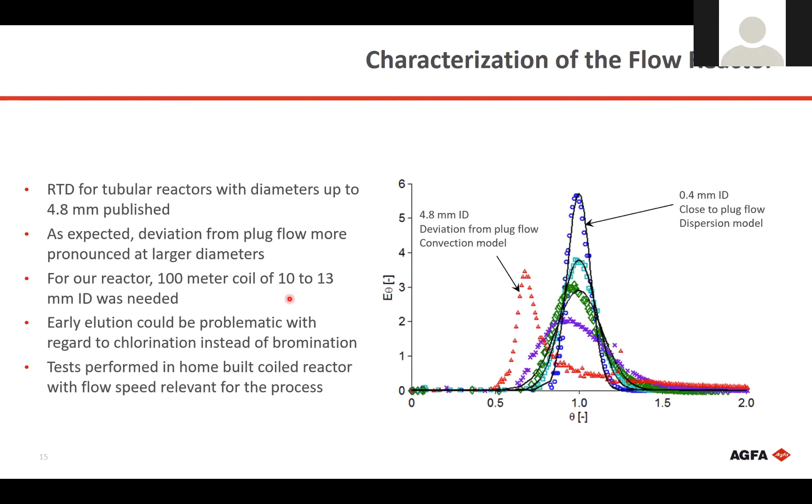So therefore, we wanted to make sure that in our specific setup, where we used a coiled reactor with a tube diameter between 10 and 13 millimeter, we had a sufficiently narrow residence time distribution. So we did some tests where we used the salt plug method to see what the residence time distribution was in our specific case.

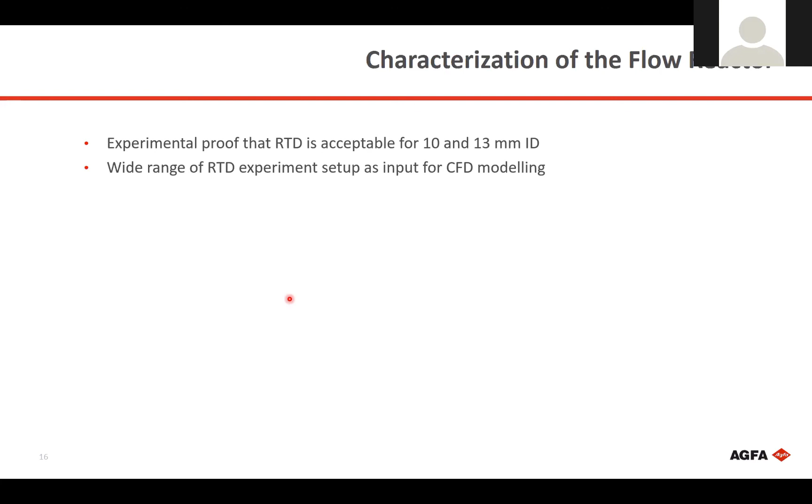So again, we wanted to have experimental proof that the residence time distribution is acceptable for both the 10 and the 13 millimeter internal diameters, and we also included larger diameters to see how far we could go. A wide range of residence time experiments was set up as input for CFD modeling, also at the University of Leuven, where we varied the length of the reactor, the coiling diameter of the reactor, and the flow speed of our mixture. As mentioned, it was a collaboration with the University of Leuven. Professor Kuhn and Professor Thomassen collaborated in this.

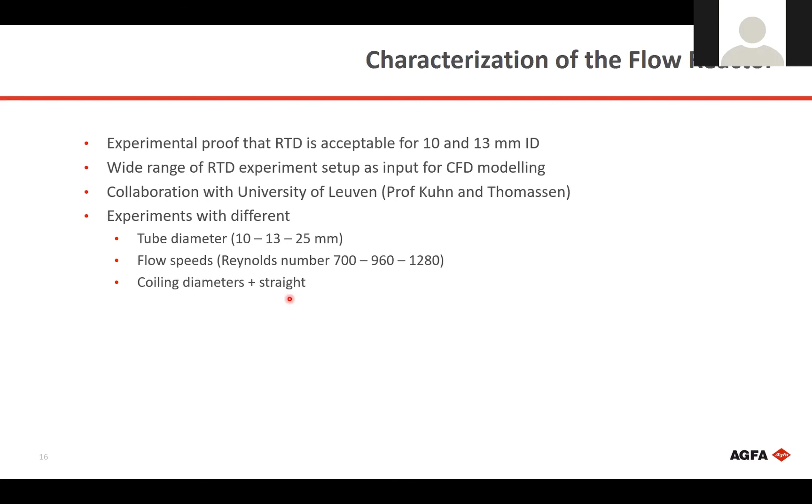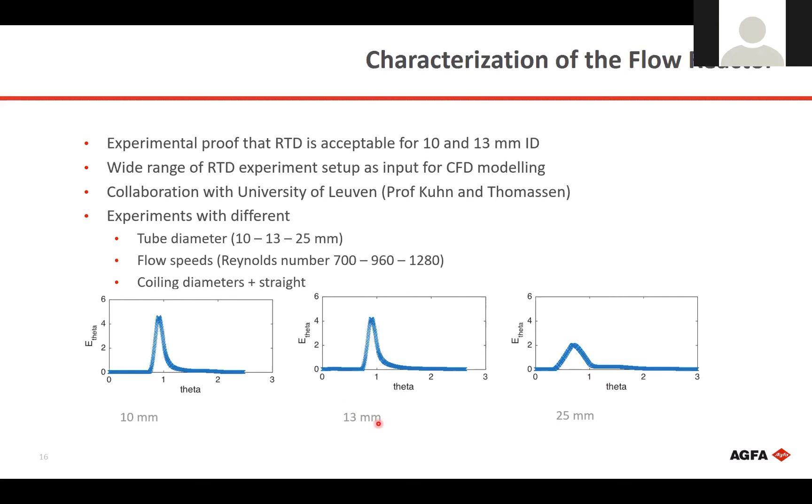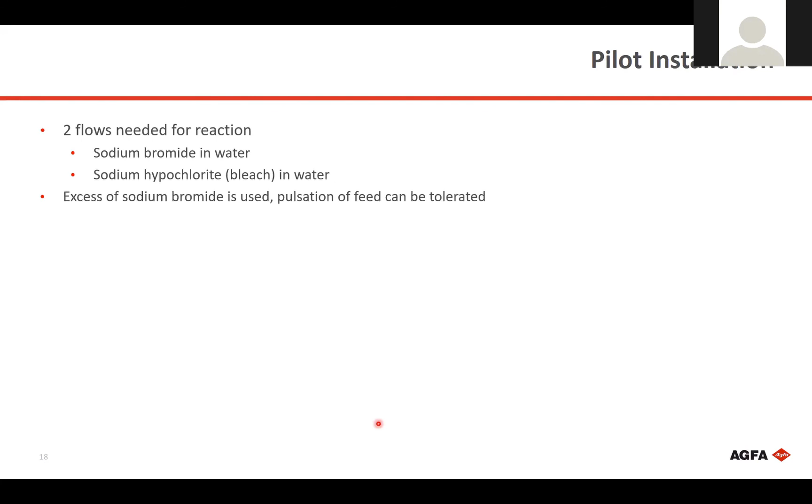Okay, so let's have a final look at what it looks like in practice. When running the process first at 400 and later on also at 1000 liter reactors for the bromination, we need two flows, the sodium bromide in water and the sodium hypochlorite, bleach, which is also a concentrated solution in water. We use an excess of sodium bromide, and that means that pulsation of the pump is acceptable because we don't need very strict stoichiometric control. So we can live with some pulsation.

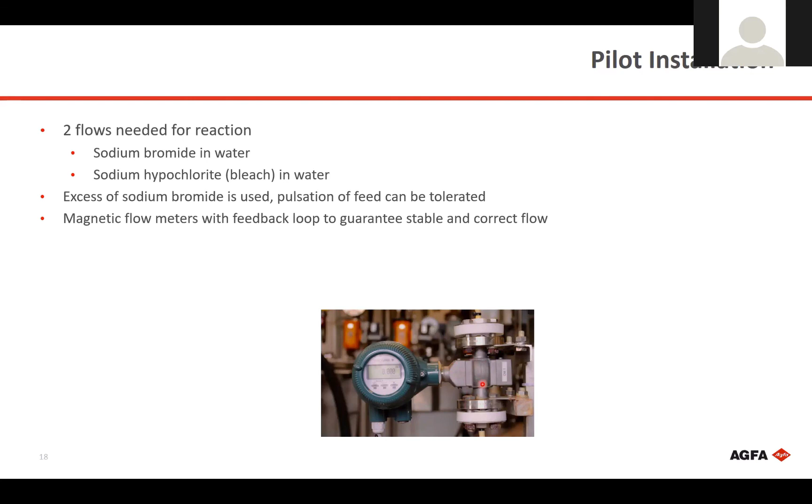Because we use aqueous solutions for both streams, we can use magnetic flow meters, which are Teflon lined, certainly needed for the bleach because it is highly corrosive, and they work very well to have a nice flow measurement on these flows. And then we have a feedback control loop, so the signal from the flow measurement will steer the pump and control the flow from the pump.

For the pumps, we used quite simple peristaltic pumps, which was very nice because peristaltic pumps are a cheap solution, but they have several big advantages. A big advantage is that you don't have any metal parts in it if you don't want it, so you can have it perfectly Teflon lined or with other plastic materials, which is ideal for our hypochlorite solution, because otherwise we would have serious issues with corrosion. They're also very cheap, and they have a very wide span of flows which can be used with one set of pumps. So for us, it was an ideal case.

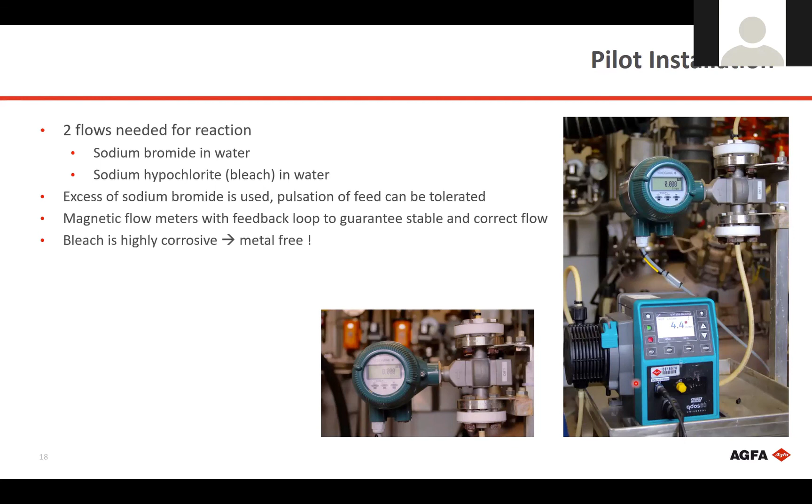A disadvantage of this type of pump is that they give some pulsation, but as already mentioned, because of the chemistry we use, this is not really relevant for us. So we were fine with these pumps. And then both pumps are controlled from one controller box, meaning that if something goes wrong, we can shut down the two pumps immediately, and that we have perfect control over the flow of the two streams together.

The hypochlorite solution in itself is yellow at the start and turns more orange to the end. So you can see visually as well that the reaction is taking place. And it works very nicely. And again, it's dead cheap and it's very robust. It works as it should.

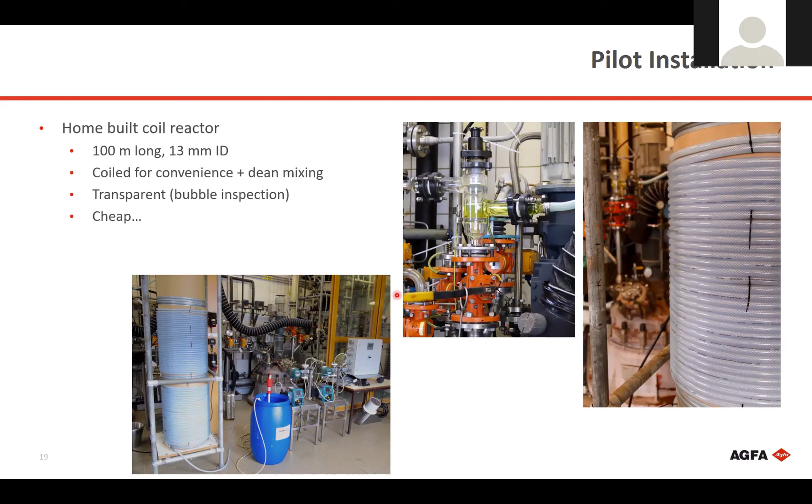To enhance mixing, of course, because this is obviously a laminar flow profile inside your reactor, we just threw in 100 of these small disposable static mixer elements. They just cost €1 each. So we just threw 100 in the first meter. That will certainly be sufficient. You could probably do with less, but calculating how much we would need would be more expensive than just throwing in 100 pieces of them.

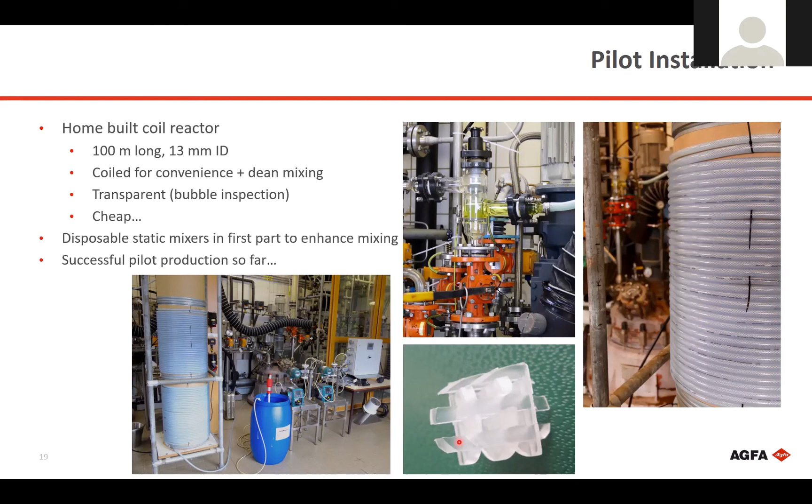We have run quite a lot of pilot productions so far. We have already saved more than a ton of liquid bromine, which we didn't have to buy, which we didn't have to store, and which we didn't have to use. So the safety gain we had there was quite nice.

So that brings me to the conclusions of this presentation. We were able to develop a flow process to produce aqueous hypobromite solution where we didn't need any liquid bromine at all, only bleach and sodium bromide. This is, of course, a huge benefit with regard to safety. And it was also very practical because it was just a plain drop-in for the bromine process, because we use the standard hypobromite solution exactly the same as we produced in our batch process. So there were no issues with requalification of the process and so on.

We were able to have a proof of concept with cheap non-ATEX equipment, and we are now in the final phase of building an ATEX-approved skid to do the same in our larger reactors. Proof of concept for scale-up to 1,000 liters has already been demonstrated, and all this results in a cost reduction of 30%, which is purely due to the larger scale we can operate at.

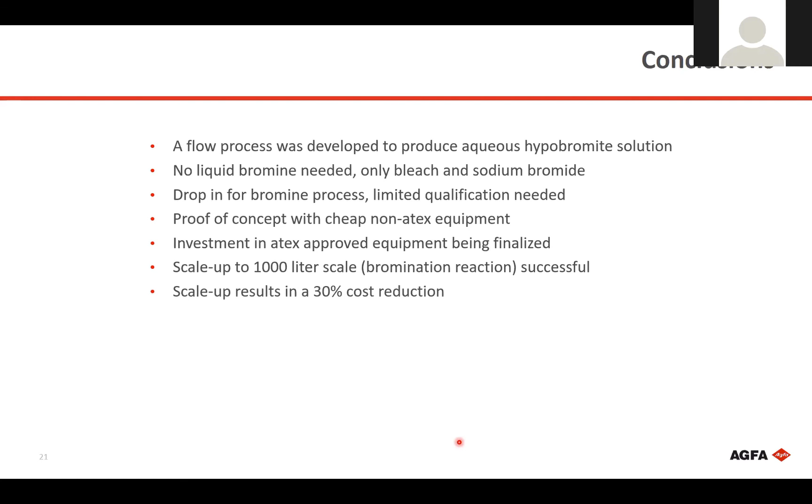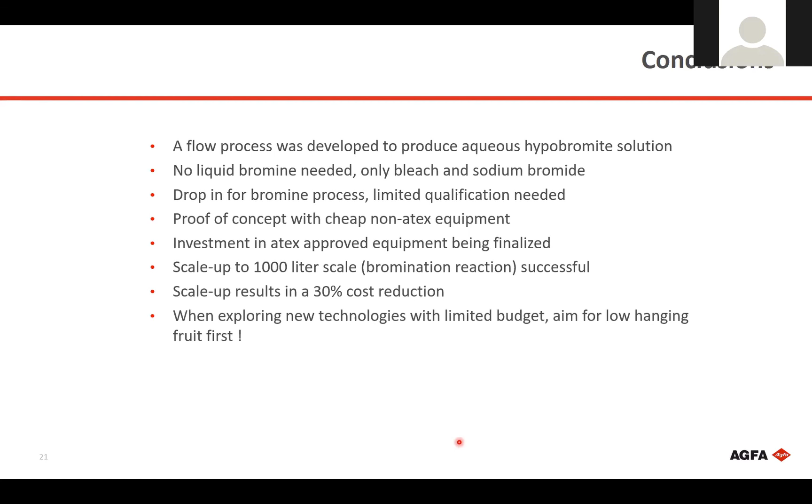And the final take-home message, I think, is that when exploring new technologies with a limited budget, aim for the low-hanging fruit first. In this case, it was technologically a very easy solution, but with a very big impact on process safety and also on cost for this process. So it was really a no-brainer.